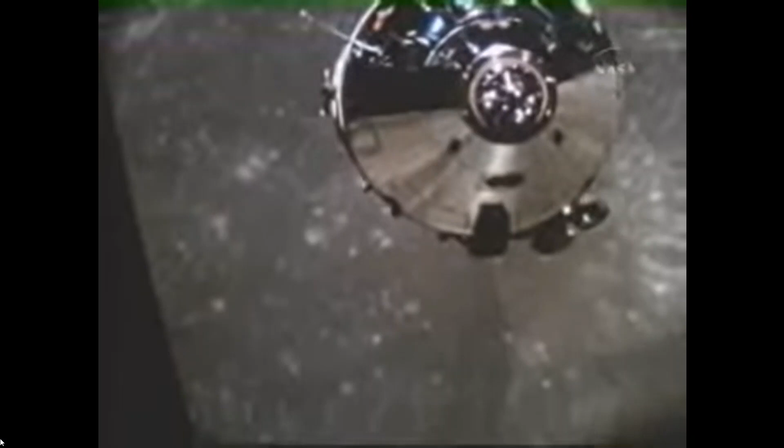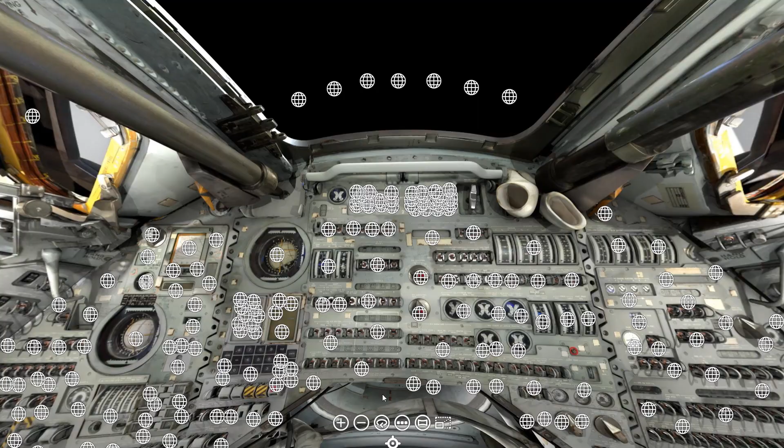In this issue of Spacecraft Guide, we are going to continue our work on the new panel of the lunar lander, the one down here. We're going to continue our work on the water control module panel, and we are going to do a new valve or switch. This is the secondary evaporation flow switch.

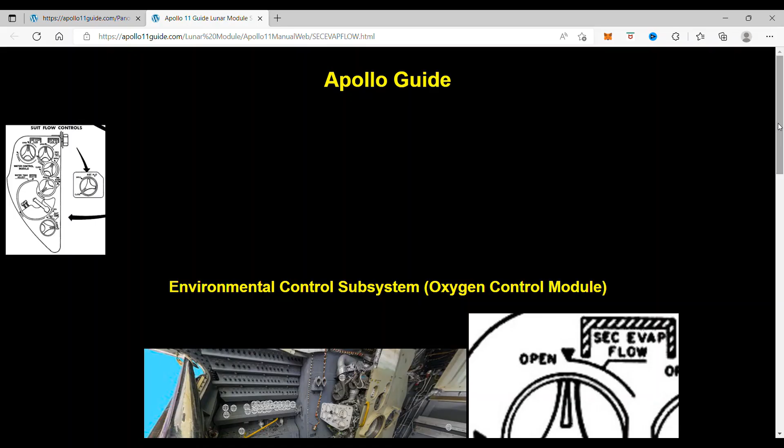When you click on it, it takes you to the secondary evaporation flow valve page. This valve allows for flow of water to the secondary pressure regulator, through flow limiters to the secondary sublimator and the suit circuits sublimator, through a flow limiter to the primary sublimator. When it's open, the water is routed through the flow limiter to the secondary sublimator. If it's closed, the water is stopped from flowing through a flow limiter to the secondary sublimator.

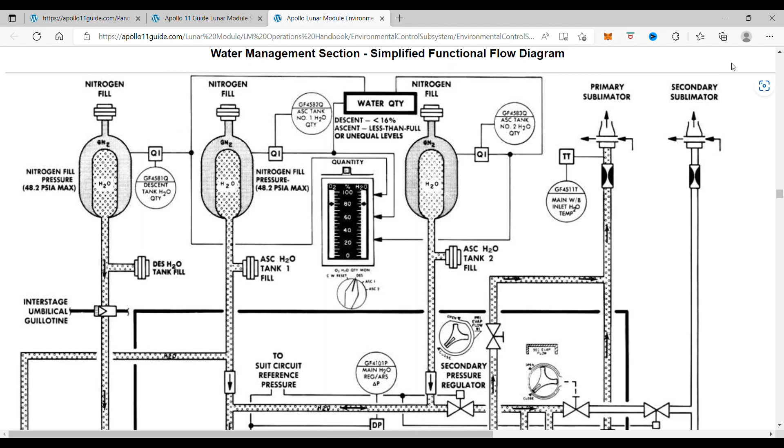What that all does is the same thing as the first one. It's basically a backup. So when we go to the schematics, we see that the secondary evaporation flow valve is right here.

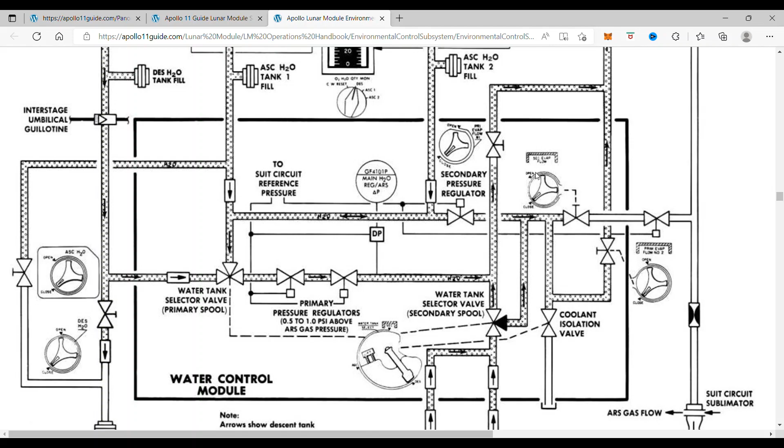Here it is closed, and that does not let any water, as you can see, go into this line. Now when we open this valve up, what that does is the water is now allowed to go to the secondary sublimator. And as we've seen before in the diagram, we have the water feed.

Now here's the primary. Up here, we have the secondary water sublimator. That puts the water into the flow system to get water to all of the components that are generating heat and cool them off in the lunar module cabin.

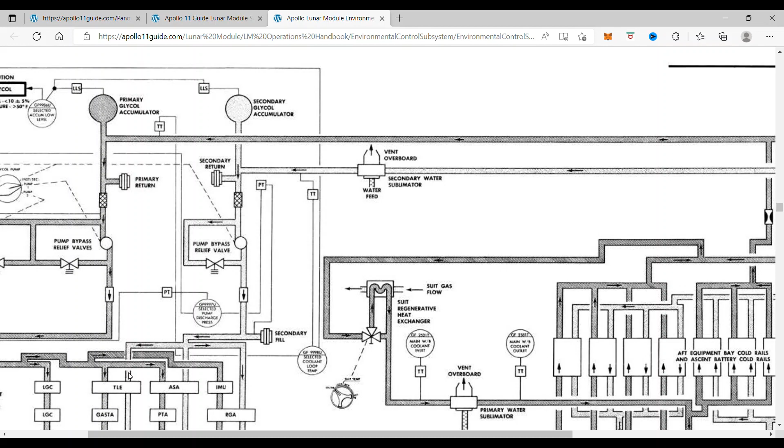As you can see, it goes through here, through some of the components. These are the ones that contribute a high rate of heat. It comes back down here. It doesn't go through the suit liquid cooling system, but it does come up into the aft equipment bay cold rails and ascent battery cold rails.

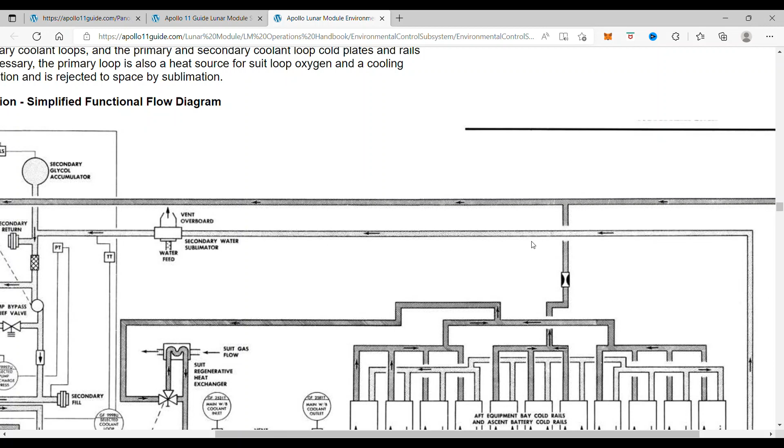Now, what this does is it cools the water down, which stays within the system to help cool the important components down to keep the temperature low in the lunar module cabin.